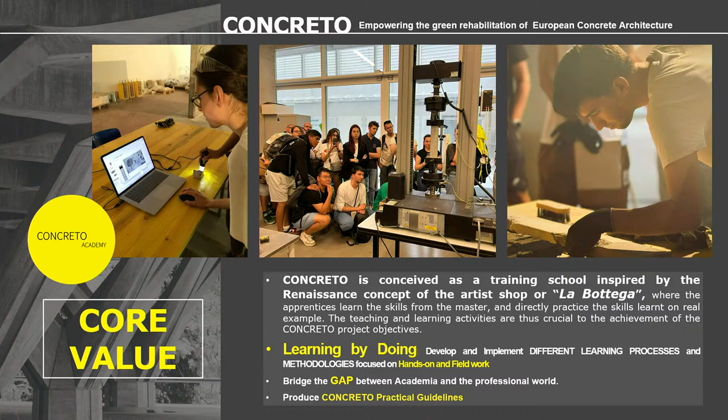It's really more conceived as a fellowship, as an apprenticeship, than a formal education in a way. And the ultimate goal is really to bridge the gap, to create a dialogue between, on one end, the academic world, which provides the great formal education that most of you in this audience have, and the professional world, the practical. Because as you know, since you're probably involved in this type of work, the success of our intervention relies on the quality of what happens in the field. So this is a very important aspect of this project.

The background, as Elisabetta and the previous speaker, who gave a really nice welcome, hinted, is why we decided to develop this project. On one end, we were moved by the safeguard and protection of modern architecture, modern heritage. On the other hand, responding to urgent European policy to renovate and really work with our existing built environment, and more simply, we have a very large portfolio of concrete buildings and concrete infrastructure that are getting older and are in need of our help.

Nobody can deny that this unique man, the work of Pierluigi Nervi, has indeed been one of the main inspirations of this project. It certainly brought me back to Italy from the US to work on Nervi, so for me, it did the trick. But indeed, Nervi left us an incredible legacy. The foundation was established in 2008 by Marco Nervi, who is hiding in the audience. We will point him out in a little bit, and indeed Elisabetta. In the past two decades, they've worked really hard to promote, protect, and preserve Nervi's work, but not only.

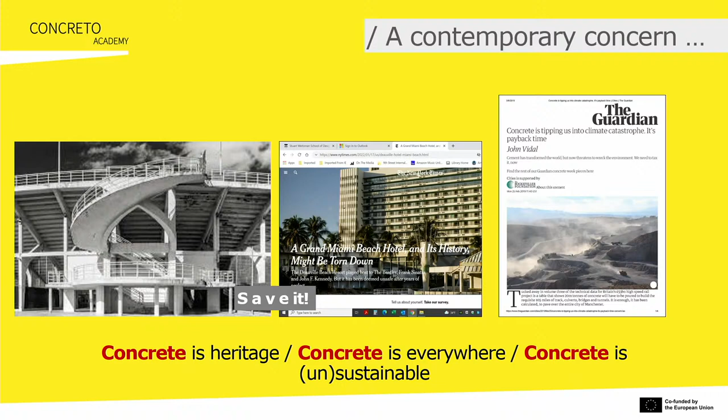Not only that, but concrete today is the most widely used substance after water, and indeed the third largest carbon dioxide emitter in the world. Any study of concrete today, past, present, and future, must consider contemporary concern for retention and reuse of what has already been built and the industry's ecological transition to greater sustainability.

Despite the great progress achieved in the last 200 years since the introduction and patent of Portland cement, which we celebrated in 2024, concrete technology has advanced greatly as a material that has allowed us to build our cities, but it's still very disappointing when we look at stats on how we are doing with our interventions in terms of repair, durability, and performance. I think in this audience we can fairly say that we can split the blame between the design professionals and the people that actually do the work in the field.

For this reason, we reflect that working with this material, although very economical and very versatile, requires a very specialized set of skills. It's artificially made, it's made in the field, which on one end gives us incredible opportunity, but on the other is always a good reminder that it relies a lot on the quality of the craftsmanship. So as we are faced with intervening in this architecture, thinking about this type of specialized skills is incredibly important.

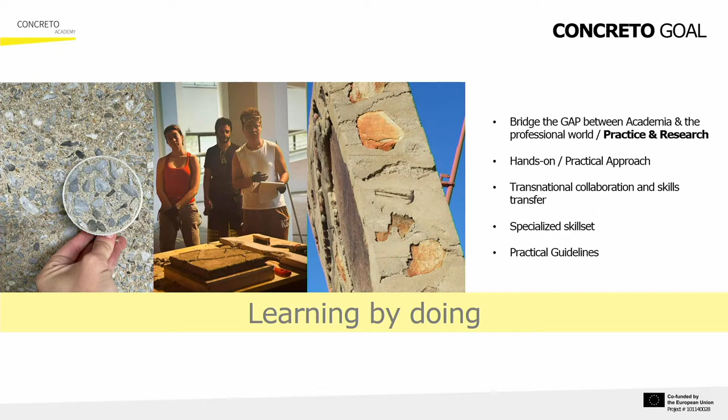So after this little background, this has been the goal behind this project: to bridge the gap between practice and research, to give a practical approach, to show how things are done, to allow professionals who design interventions to see what it takes to do a patch repair, which is still today quite a challenging task. All the teaching and training activities of Concreto revolve around what we call the five skill pillars of knowledge, the A to Z of working with existing concrete structures, starting from concrete assessment and moving to all the different types of techniques.

Who takes part in this project? They're all sitting in this room. There are students from architecture and engineering schools. There are students from VET organizations, craft schools, who are going to be the technicians in the field of tomorrow. And then there are young engineers and young architects already working in the field.

The Concreto journey, as we refer to it, is a one-year program. We are not meeting every day; it's not a continuous 360 concrete full immersion. We have three appointments during the year. We start with an online introductory training where we first get to know one another and introduce some of the big challenges and main topics through case studies. This year we started in January. Then we are here now, about to complete our Master Your Skills, the eight days of hybrid learning. Last year we were hosted by our partner in Milano, at the Polytechnic of Milan. This year we're here in Madrid.

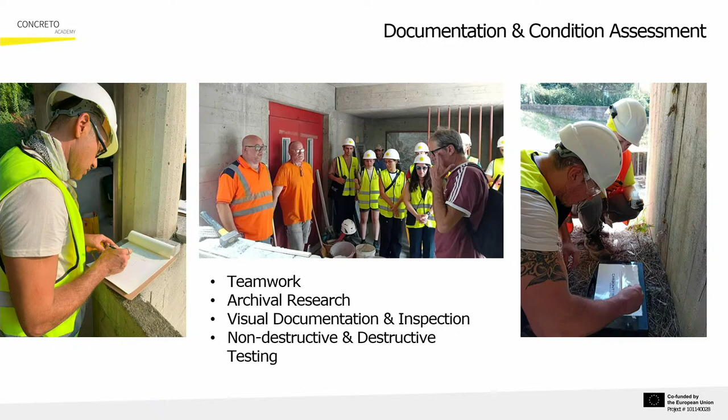So they really start from archival research, and then they were assigned different parts of the building to identify how the building was built, and then continue with some of the most common diagnostic testing usually done when working with concrete.

After spending a week in the sun, we brought them back inside to the laboratory with no air conditioning, where we really started going through the basics of how concrete works, making some concrete, what it takes to change ingredients, and how difficult it really is to work with this material. We also put Marco to work, as you see here. We had to have a kind of blessing before we really got going.

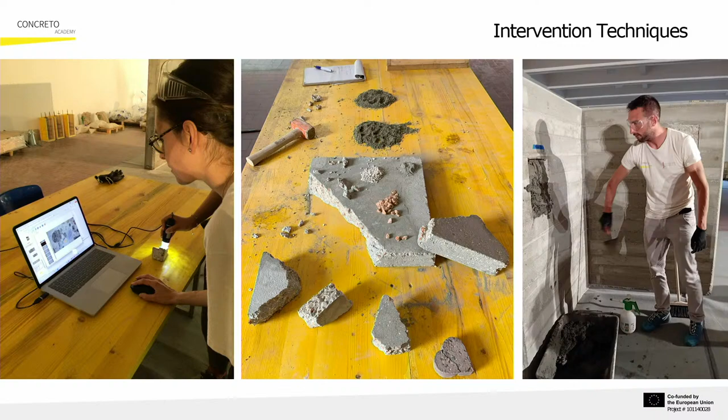These are some additional exercises dealing with how to match and work when replicating historic concrete. We have Matteo here trying to perform a patch repair, which I think he can confirm was not a really easy task. We also touched upon electrochemical techniques and so on.

So in the end, regarding the sustainability of this project, it is a 3-year project. We are in the 2nd year, with 1 more year. As the end goal of these 3 years, we have the publication of practical guidelines referring to the different types of intervention and assessment for concrete, and also the production of very short massive open online courses on an open source platform. And then, as you can read there, the future is also to be able to independently continue this as a training institute.

We should maybe mention the book that will be coming out. Yes, we are also very close to publishing one of the first products: a state-of-the-art research and literature review done from the start of the project, trying to really understand the gaps, what we are doing well, what we are missing. And of course we have to call out Guido from Docomomo, because they were leading this effort and have done a really great job.

Concreto is an alliance for enterprises and education project under the Erasmus Plus program launched in January of 2024. Led by the Pierluigi Nervi Project Foundation, the Concreto Consortium includes 13 partners from Italy, Spain, Belgium, the Netherlands, and Turkey, comprising higher education institutions, vocational training organizations, national trade associations, and modern heritage organizations. The project draws inspiration from Pierluigi Nervi's architectural legacy and focuses on developing skills for the green rehabilitation of concrete architecture.

Inspired by the Renaissance idea of the art shop, La Bottega, Concreto is conceived as a training school combining theoretical learning with hands-on practical experience. Each year, Concreto brings together university students, craft workers, and young professionals to learn and collaborate together, aiming to bridge the gap between academia and the professional world. Concreto identified 5 skills pillars of theoretical and practical knowledge for professionals to master when engaged with the rehabilitation and regeneration of our concrete buildings.

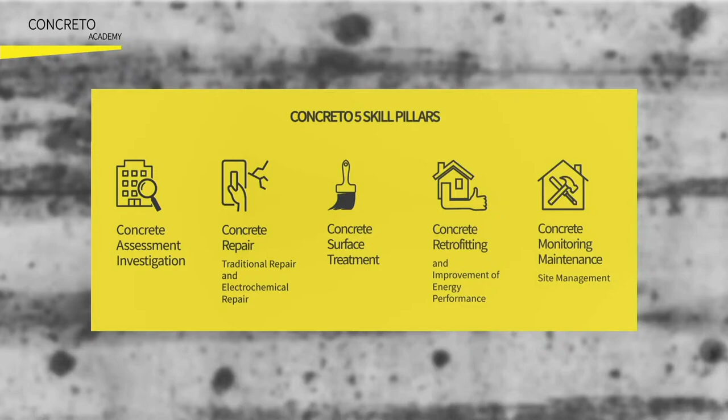The teaching and training activities are organized in 3 sequential units around the 5 skills pillars as Concreto workshops, intended to link education with practical sessions. Starting with the Concreto Stepping Stone, then followed by the Concreto Master Your Skills, and ending with the Concreto Masterpiece, the final summer school with 100% hands-on fieldwork experience, which will take place at the UNESCO site in Ivrea in Italy. The Concreto Academy supports the two-way approach of principle and practice, promoting smarter and greener renovations to ensure the safeguard of our concrete quality architecture.

The Concreto Academy seeks to equip today's professionals with the skills needed to become tomorrow's experts in sustainable building practices. And remember, our European concrete quality building stock is a non-renewable common good, whose preservation and empowerment are the responsibility of society as a whole.

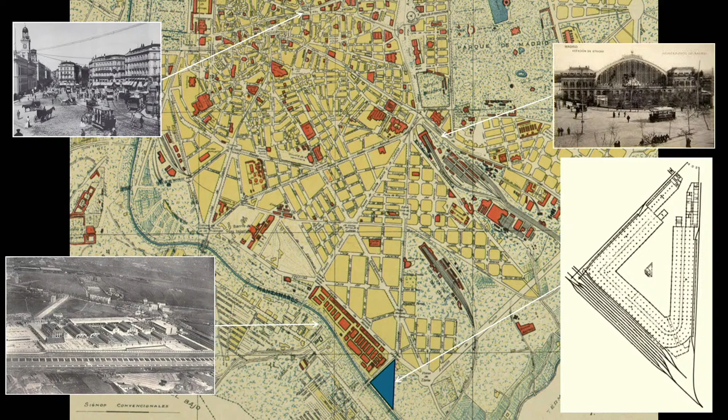Close to it, there was a site of the city council with this triangular shape because of the railway tracks, and it is here where the council decided to build the market. Matadero had been built in a regionalist style; in Madrid the regionalist style used stones, bricks to make arches, etc.

But the architect, Javier Ferrero, decided to change this completely, and he used concrete to build the new market, and made another decision, which was to use the space in a very functional way, placing all the buildings at the edges of the triangle, leaving in the center a huge square where sales could be done.

Here is Javier Ferrero and some views of the building at the edges of the site. You can see the section, and it is always the same. It's a very repetitive frame with large spaces and with no decoration, which places it in the rationalist style of architecture. Only on the second floor there are two quite large canopies, we'll see later, that break this uniform architecture and structure.

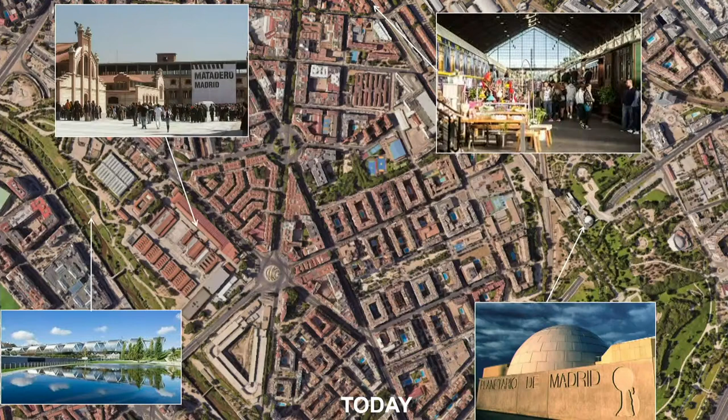It was in use from 1935 until 1983, when another bigger market was built, which is Mercamadrid. From then until the beginning of this cycle, it was abandoned, and many damages and problems arose. The city has been growing, and now that suburb of the 1920s is a center of leisure and culture in Madrid. I already mentioned Matadero, but there are other places for leisure and culture. So it is important that this building has a use. It is very important because I live here, so it's good for me.

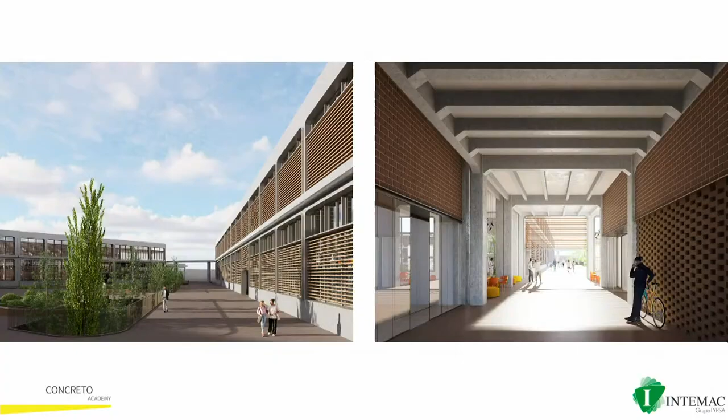The idea of the project is to maintain the idea of Javier Ferrero, which is that great square in the center and the buildings at the edges. Some views of the rehabilitation that is now in course, and as you can see, the structure is maintained, and it's the same as it was 100 years before. Some views with the new uses.

And a question arises. It will cost 100 million euros. Somebody could ask if this investment is worth it. I have no doubt, and in this context, nobody doubts, because of the sustainability and heritage values that this building and this architecture have.

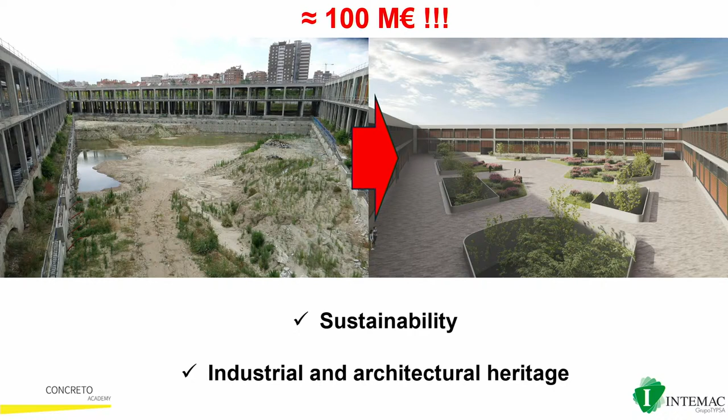But let's go with the structure, and we have to go to 1931 when the market was designed. It is interesting to see that although concrete was already a consolidated material, the structure is very similar to those of Hennebique at the end of the 19th century, with those frames, with the haunches where they meet the column, with ribbed slabs, etc. They are very similar structures.

Of course, those patents had passed, and structures like those of Freyssinet or the roofs of the German engineers, Dischinger, etc., had already been built. And in fact, Le Corbusier had published Towards a New Architecture, and had embraced concrete for architecture.

In Spain, the situation was quite similar. At the beginning, we used patents, mainly from France. Ribera was the engineer who introduced most of them. And from 1910, concrete was taught in the school, in the Polytechnic of Madrid. After Ribera, many engineers came. You already mentioned Torroja, but there were many others.

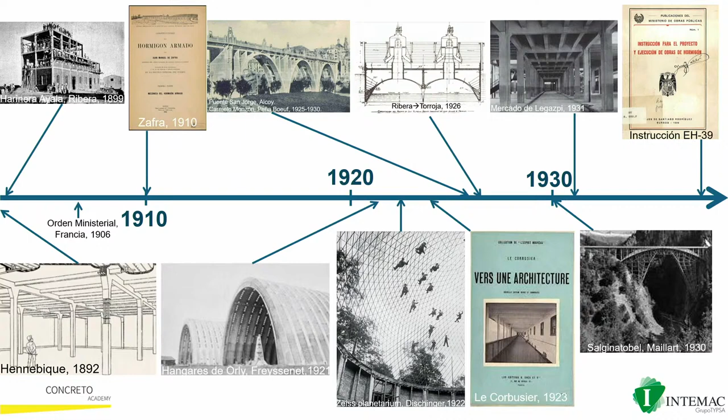Alfonso Peña, that I mentioned before, was a civil engineer. He had teachers like Zafra, who was the first teacher of concrete in the Politécnica de Madrid. And when Zafra died, he took his chair of concrete. He published many books that have been a reference for many engineers in Spain, but he didn't have many projects. But he imagined many projects. He was a dreamer.

For example, it surprised me when I studied him for the first time that in the 1930s he already dreamed of a bridge over Gibraltar. That surprised me. Another interesting fact about Alfonso Peña is that he was the Minister of Public Works in Spain after the war.

Today, Carlos Polimón, who is an expert in bridges in Spain, is not going to speak about bridges, so I'm going to tell you about a curiosity of Alfonso Peña: in 1932, he designed an aqueduct in the north of Spain, in Tardienta, but his partners didn't like the design, and they had doubts about the security of the aqueduct. He made models to prove that it was correct, but because of the war, this project was stopped.

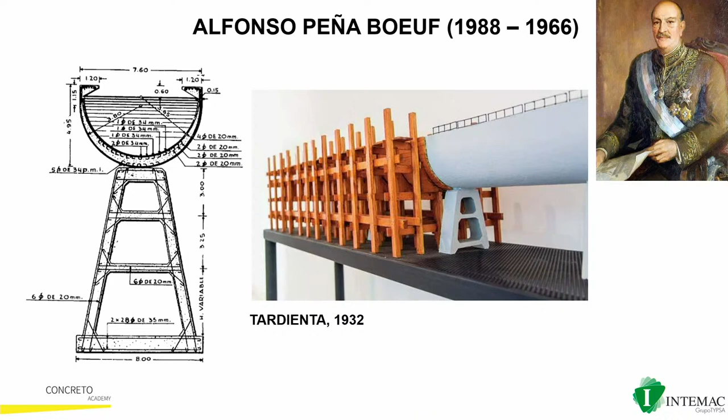After the war, they made some proof loading, and they checked they were right, so they could build the aqueduct, and it was the Minister who inaugurated his own work, which never happened in Spain. This structure is very similar to that of Torroja. The other one is much more elegant, but maybe Alfonso inspired Torroja in the beginning.

Let's go back to the market. As you can see, it is a very robust structure, mainly in the central corridor where vehicles had to go to distribute the food. In the roof, there were these canopies, which are 6.5 meters. It's quite a lot. In fact, the first time I had to check the structure, I didn't know how it worked, because I didn't think that an engineer then could design this by torsion. But it wasn't like that. He designed a lot of torsion reinforcement to resist this canopy.

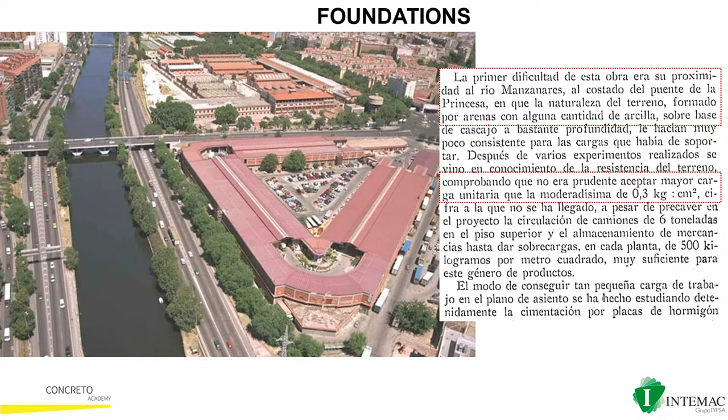But the main problem of the market for the restoration that has been carried out is the foundations. As I mentioned before, and as you can see in this picture, the market is close to the river. Alfonso Peña knew the soil was not so good, and in fact, he designed truncated-pyramidal footings so that the stresses in the soil were low enough. Despite this precaution, many damages appeared in the facades and also in the structure.

I don't want to be very technical, but I can't resist explaining some of these damages. For example, these ones. As you know, at the end of a frame, you have negative moments that compress the bottom part of the section. So, in the beginning, no reinforcement is necessary in the bottom side. But every code recommends or establishes that you have to put 1/4 of the bottom reinforcement into the column. This is because you can have a change of the moments, for example, because of settlement.

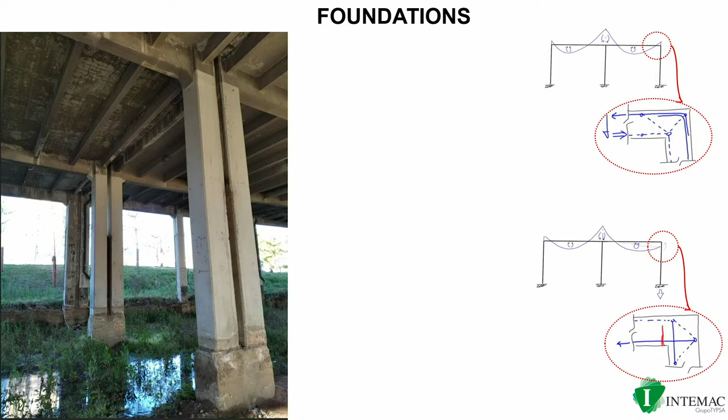And here it's clear. If you have a settlement, positive moments will create tension in the bottom reinforcement that you need at that point. If you don't have it, or as in this case you have it but it is not enough, great cracks appear, and they have to be treated. Because of these kinds of damages, and because of the new uses and new floors in the market, underpinning had to be done in all the foundations.

It was decided to do it with micropiles, and the problem of this kind of intervention is to transfer the loads from the column to the micropiles. In the beginning, if the loads are not too big, we can do it inside the existing footing. It means we have to check that the bond between the micropile and the footing is high enough, and that the stresses generated in the footing are also low enough. This was not the case in most of the footings of the market, and another solution had to be found.

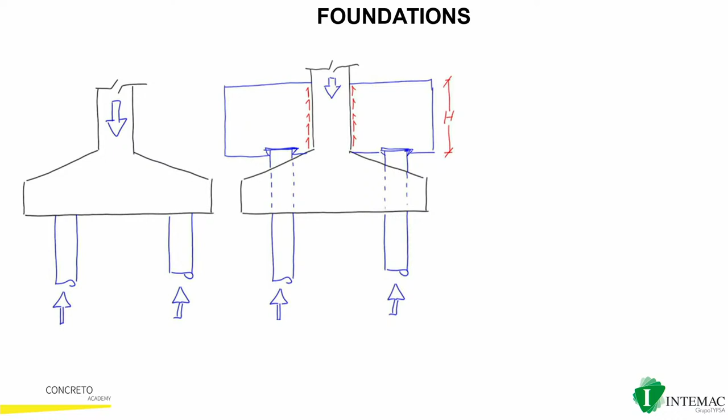As there was no problem of height over the footings, we decided to make caps over the existing footings. But the problem is the same: we have to transfer the loads from the column to the micropiles. And to do this, we have different mechanisms. The first one is just shrinkage. Because of shrinkage, there will be compressions against the column, and this will improve the bond between the column and the cap.

If we don't trust in this shrinkage, we can analyze the reinforcement. We can place it analyzing shear friction, which means that when the column tries to slip inside the footing, the cap in this case, the reinforcement will be in tension, which means that there have to be compressions against the column. Okay?

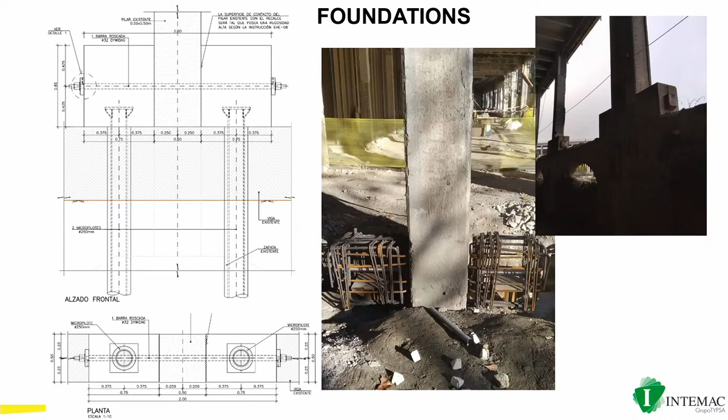If not, another solution is to pre-stress that cap. And this is the only solution in the case of the facades, as you can see here. I don't know if you can see the point, but here is the existing footing, and this is the new cap that is pre-stressed, so that there are compressions that improve bonding. This solution was also used in the interior columns. Here you can see the execution of the micropiles, the placement of the reinforcement, concreting, and then pre-stressing.

Here another doubt arises, because once you pre-stress, you don't know what you are pre-stressing. What you want to do is to pre-stress the cap against the column, not the cap itself. But, well, they decided to do this, and as other mechanisms work, it's enough for us.

These interventions meant 15 million euros. It is a lot, but it is not so much if we compare it with the amount that the council wants to save because of the booking or renting of other buildings. All the people will come here, and they won't have to rent other buildings.

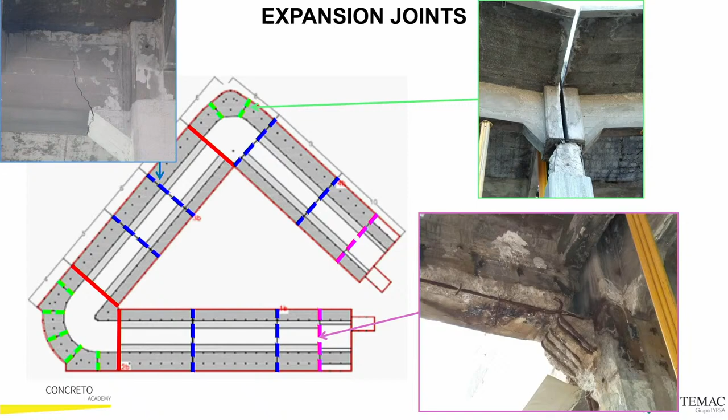In both cases, we decided to eliminate the joints and to change the structural behavior, placing new reinforcement in the top side of these elements, so that new reinforcement will work against new loads. Of course, this kind of intervention must be analyzed, and it is interesting to see that when we modeled the frame without these joints, the movements that result are quite similar to those that the market had with free deformation.

And it is because for very low change in temperature, the supports will crack. And this means that the stiffness of the column will be reduced, and it allows to have the deformation. In fact, the moments in the supports were very low, and as they had a lot of ductility, because the loads are very low and the amount of reinforcement is also very low, ductility was enough, and there was no problem because of closing the joints.

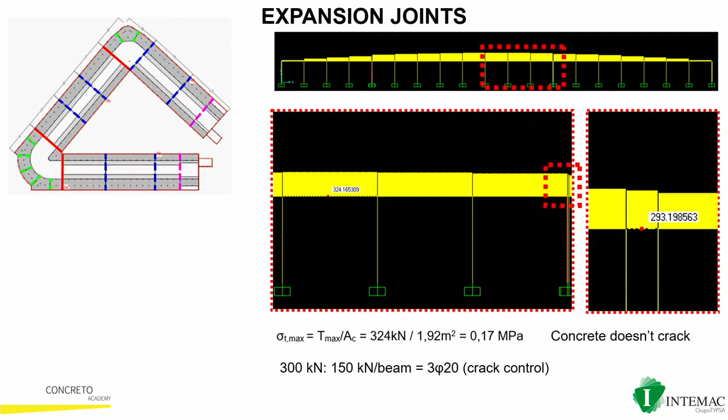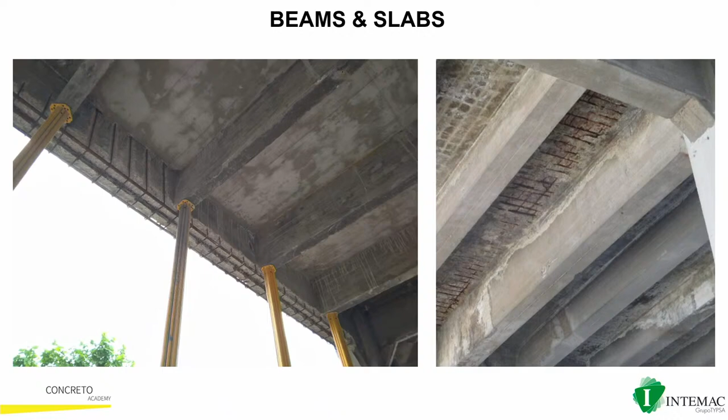Finally, I wanted to talk about beams and slabs, where the problems were mainly corrosion problems, durability problems, but also fire protection, security in a situation of fire. I'm not going to speak about corrosion and durability because we have Carmen and Carlos after me, but I want to point out that in the assessment of existing structures, it's very important to distinguish from existing codes, because existing codes for design are thought to establish some requirements of geometry, of covers, that probably in an existing structure you can't meet. So we have to do a performance analysis to check if security and functional needs are compliant or not.

In this sense, I want to show you the situation of the ribs of the market against fire. As you probably know, in those years, the reinforcement had a sketch like this, with reinforcement in the top side close to the column, that goes down to the bottom side in the center. In addition to that, covers were very low, and this can be a problem in a situation of fire. Why?

As you also probably know, when you heat a beam, an isostatic beam, it will have a deflection, and the moments will be the same, no change in moments in the beam. But if this beam has continuity over the supports, this deflection is not free, and there will be negative moments that make the law of moments increase; negative moments will increase.

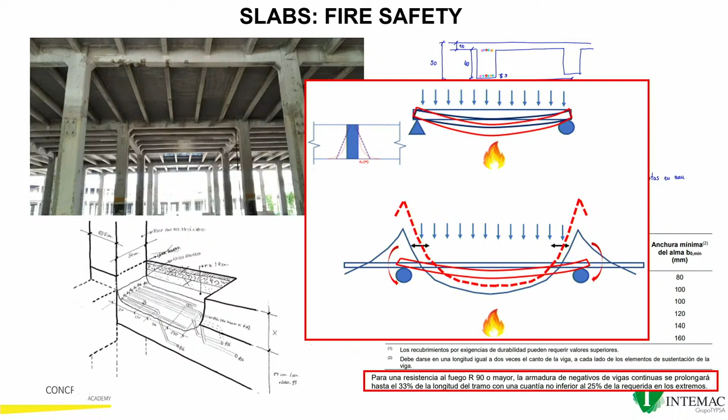That's why in design codes there is a sentence requiring that the length of the negative reinforcement must be longer than in other situations. To analyze this, we can have the isotherms in the section, which are the temperatures for a fire. Including these temperatures in the section and in a model, we can see how the negative moments are increased.

But we are doing something wrong, and it is that in this image we are considering that concrete is the same as in design, no changes because of the high temperatures. But high temperatures mean that the properties of concrete change, and in fact the stiffness of concrete is reduced from the very beginning when you heat it.

If you take this into account, the increase of negative moments is really low. And if you compare the loads with the capacities, which are in red in this graph, it can be checked that the slab didn't need any protection against fire.

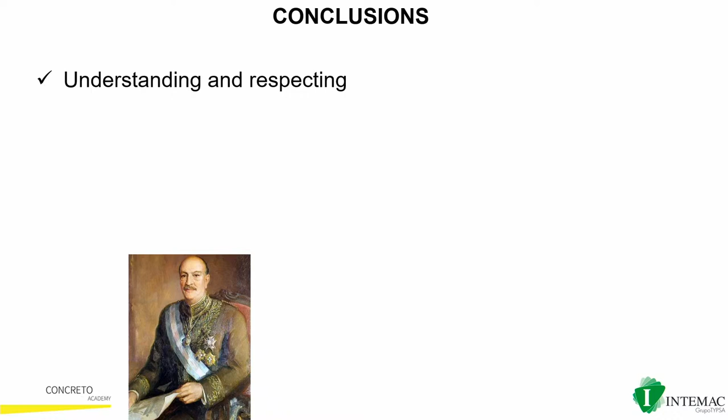Just to finish, some conclusions. The first one, the importance of understanding and respecting engineers, people, architects that have been before us in the works where we go. Second, the best reinforcement is no reinforcement. It's better to analyze it better to try to avoid reinforcement.

Another conclusion is that in many interventions of this kind, the problem is not to assure security. The problem usually is linked with functional requirements and durability problems. And finally, we have to take into account that this kind of works are living projects. We can try to make the best project for the restoration, but there will always be things in the works that will surprise us, and for that we need to be prepared.

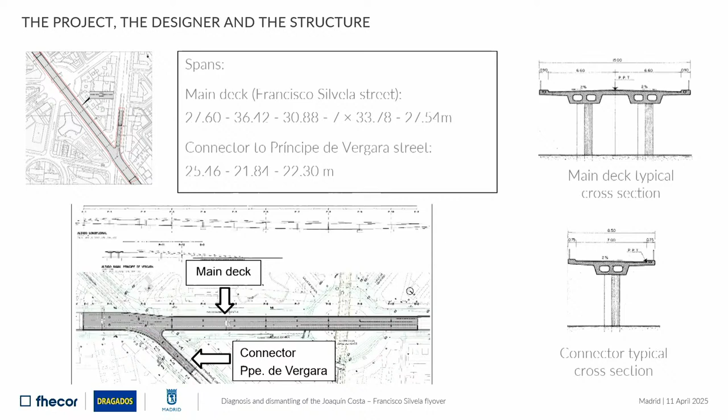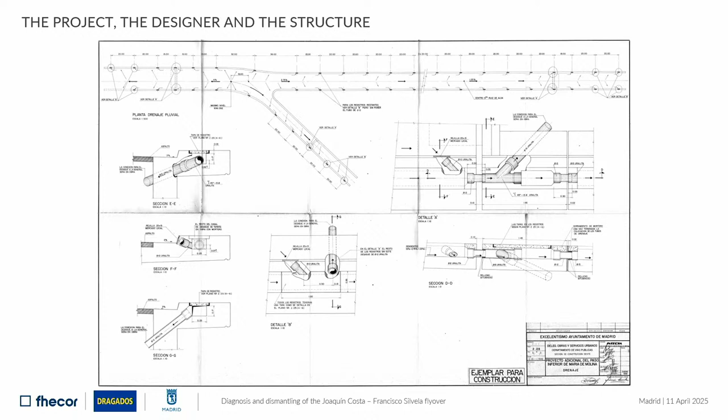Indeed, this bridge is the result of a very good project, a very good construction. This is important to make clear. This is the drawing showing the drainage. Drainage is very important in concrete structures. Water is good for human beings, for nature, but it's very bad for concrete. So any plan, any detail oriented to ensure proper drainage is very good. This is the first thing I wanted to say.

The designer was José Antonio López Jamar, perhaps not as well known as others, but a very, very good engineer. We made a clinical history of the bridge beforehand, exactly as medical doctors do with their patients. It's very important to study the story and analyze it. Indeed, as Juan said, the structure is a very slender one, 1 meter in total depth. The slenderness is quite important, over the normal standards of that time even.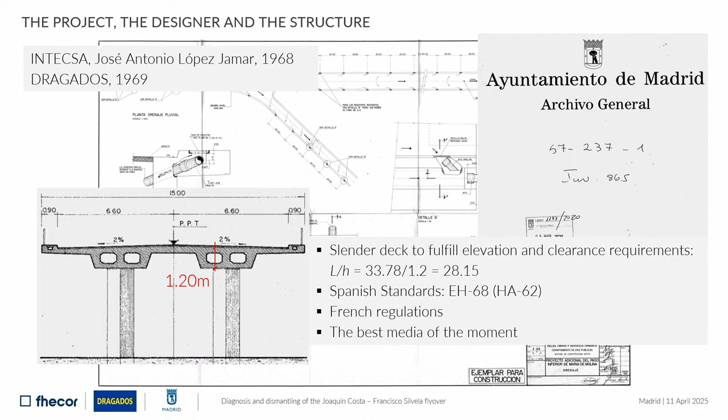The designer followed the Spanish standards of that time, and regarding prestressed concrete, only the French regulations that were available at that moment. The technology used was the best one. The project was developed in 1968. The construction started in 1969. At that time, human beings were on the moon, so the technology was very important. I would say it is a normal, current bridge from this point of view.

This is a plan showing the layout of prestressing tendons, some anchorages here, but it is important to say that this was made in just 1 meter 20 centimeters height. So it was very difficult to provide the geometry. Those voids you see here, with wood formwork, were really difficult. It's necessary to recognize this situation.

Another example, this is a cross-section during the dismantling, dismantling being the fine word to describe demolition. Demolition is a bad word, a sad one, but as Sigmund Freud said, you cannot avoid having a bad government, you cannot avoid health problems, you cannot avoid in schools having students that fail. It is good to fail, otherwise some students could be a public danger in society. So it is important to bear in mind.

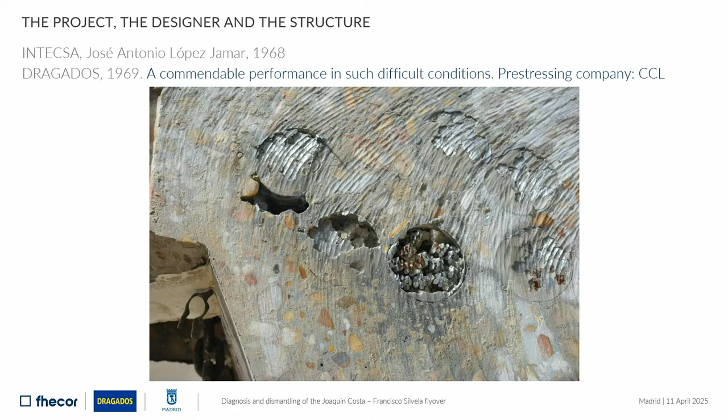This cross-section is one of the many that were carried out. You see some voids there, and you also see the displacement of the strands within the sheathing, showing that some problems had occurred in the past.

Or the detail of the top tendons on the support area. It is important to say that the amount of pre-stressing steel was very high. The criteria at that time were very different from the current criteria today. So the excess of pre-stressing was about 33% in comparison with the current criteria. On the contrary, the amount of mild reinforcement was reduced, 20% lower than today, and yes, it had some consequences.

The detected problems were long along the history of the bridge. The bridge lived for about 50 years. 50 years is exactly the time that codes ensure in the main frame of the safety formats. So it accomplished the situation, although, as Juan said, it was too young to die.

The bridge had movements in the longitudinal direction. Some cracks appear parallel to the longitudinal axis of the bridge. They were systematic. The bridge was on concrete. Maybe you think that it's steel, but no, it's concrete painted. Painter was here to jeopardize the situation. This is not a good strategy.

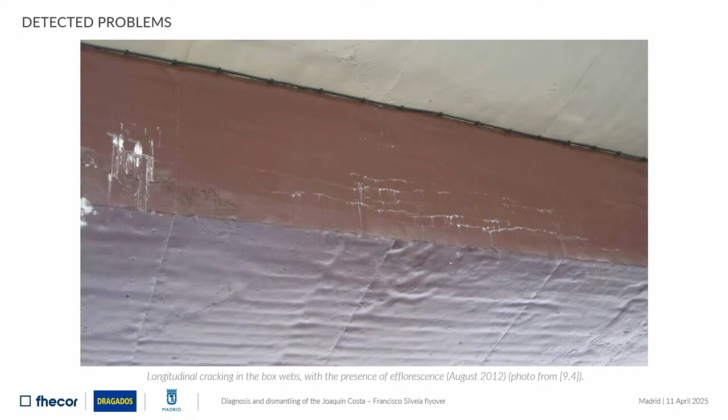Some sealed cracks here in the past without diagnosis. It is always easy to be critical with the engineers that were before you, but it was very difficult to detect the problem. It would be unfair to say that it was a mistake of the past, but we have to learn the lessons of this situation.

One Monday evening, Juan called me. I was in the school, I was teaching, and he told me, we have discovered a crack 1 centimeter wide. I could not believe that, but on the following morning I went there and I could observe that indeed that crack had happened. This crack happened all of a sudden. This is important to say.

We made a trial pit to discover the inside part of the tendon, and we observed that this tendon was broken. And in other positions, on the top part, we detected some incipient corrosion on the wires of some strands.

After analyzing the history, after making visual inspection, as medical doctors do, we made analysis. Analysis and conclusions of the clinical history are the best basis to formulate a good diagnosis. This is very important for young people.

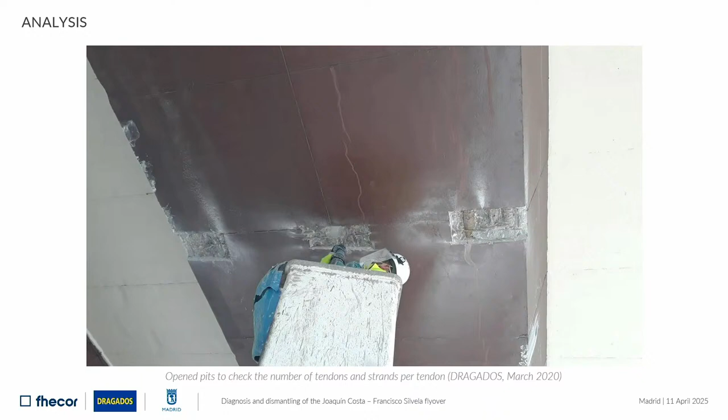We discovered that about 10% of the tendons could have corrosion problems. Some others would have been endangered by the lack of grouting, so those tendons were not protected against corrosion, and indeed they had collapsed. We took some samples of this tendon. I took it with my bike. I move around Madrid by bike. This is an example of sustainability. I went to the school and brought these samples to my colleagues in the lab.

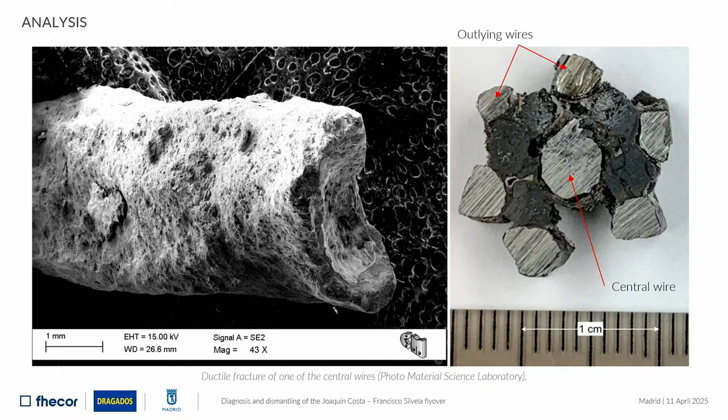They analyzed the problem. They detected that the central wires of this strand behave in a ductile way. This is important. I will show you later on a diagram. But the outlying wires exhibited corrosion with loss of section and another type of corrosion. From the mechanical point of view, central wires behaved in a ductile way, but the outlying wires behaved with brittleness. This is very bad because they have severe consequences on the safety of the structure.

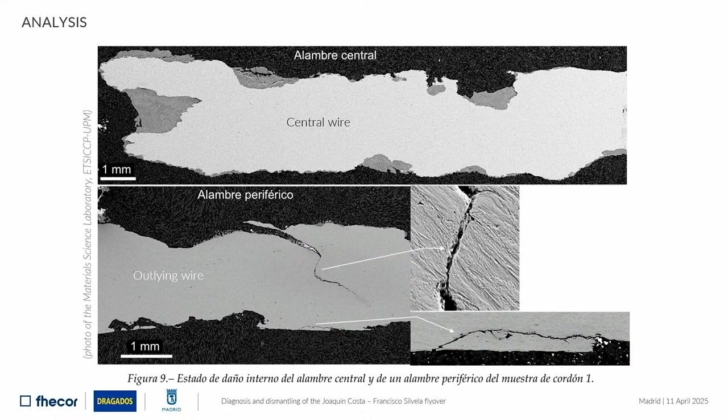Microphotographs of these wires showing the central one on the top part and the outlying wire on the bottom part with these typical inside cracks showing clearly corrosion, stress corrosion, leading to this brittle behavior. Another microphotograph showing the microstructure of the steel with some defects here. You can think that it is typical of old steels. Steel was not so old, first, and second, today the same can happen.

So this corrosion was the most important concern of the team that was there. But it was not the only one. We analyzed also concrete, and we observed, with the help of Intemac, that the samples show systematically cracks in the gravel.

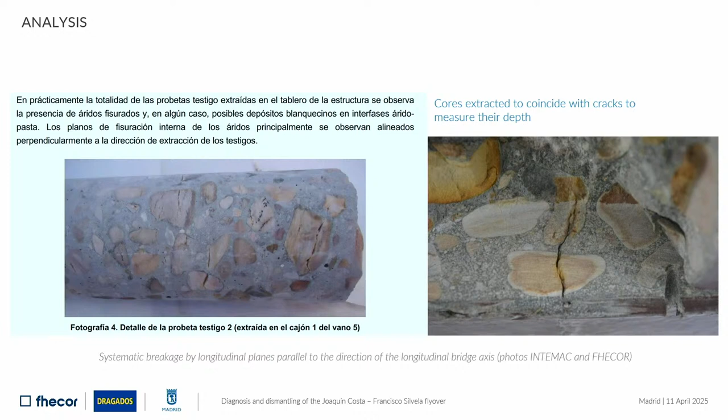The rubble was showing this type of cracks. You can see also here or here. It is very interesting because you see these stones are cracked in the same direction, but the mortar in the middle is not broken. What was happening? It was a mystery. You see these white spots that were showing an alkali reaction.

The reason why rubble was broken is that every element was submitted to the so-called Brazilian test. In this regard, you probably already know that on the central part of this specimen, you have tensile force, pure tensile force. On the top part, you have compression, and due to the difference of elastic modulus of mortar and stone, the mortar is compressed, like the top part of the rubble, but the rest is broken. So

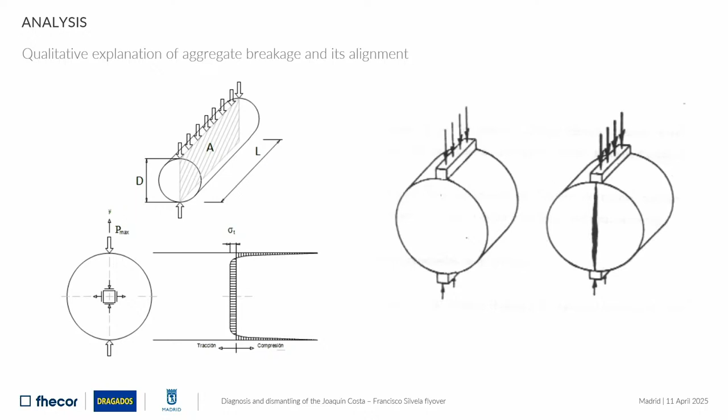concrete is not characterized by the characteristic strength. It's necessary to deepen into the analysis to analyze the microstructure or the mesostructure of the concrete. This is also a lesson to be learned. The design strength of concrete in 1968 was 400 kilos, 40 megapascals today. But the test carried out with samples taken from the bridge showed less than half, 18 megapascals. Average value, less than 30. Elastic modulus, less or about half of the theoretical results.

It was difficult. A matter of much higher concern was the endangered concrete properties, rather than the corrosion of steel. So the bridge of pre-stressed concrete was in severe danger. The quality of the picture is not very good, but you can see here water coming. We opened a drill in the box to analyze if there was water inside. Yes, a lot of water. Dark water, very similar to Coke, to give you an idea. The Coke we drink. No, this was not possible to drink.

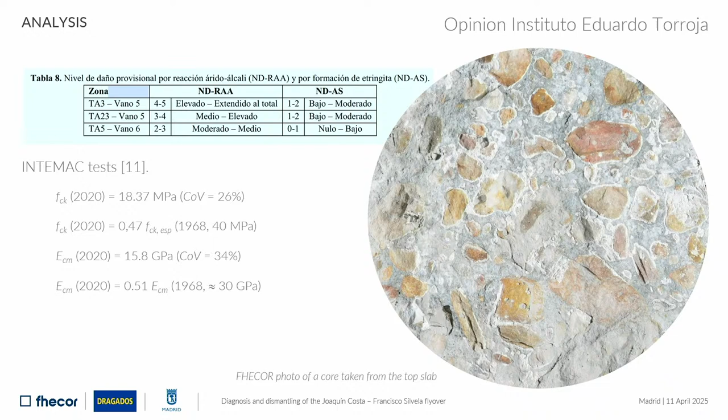We analyzed this water, and we came to the conclusion that it was an accelerator of corrosion, very bad for the structure. You can see here very clearly the surrounding white spots, showing the reaction between alkali and the aggregate. As mentioned, the load-bearing capacity was very endangered from the point of view of the resistance. It was interesting because the logical conclusion is that if a bridge has deflections, it's probably due to the elastic modulus being reduced. But the structure was perfectly aligned. You could still see the camber, the pre-camber they probably provided during the construction.

So the visual inspection and the experimental results became contradictory. Even more if you take into account that deflection is obtained according to this formula. You already know that. So deflection depends on the inverse of the elastic modulus. If the elastic modulus is divided by 2, deflection should be double, but not. The bridge had not experienced deflections. Why? Because on the top part of this formula, you have Q, the load.

But the net load, which is the sum of the external load, self-weight, permanent loads, and so on, plus the loads induced by the deviation forces of the pre-stressing, was almost zero, because by the end of the 60s, beginning of the 70s, even in Spain till the beginning of the 90s, the pre-stressing criterion was to provide the structure as big an amount of pre-stressing as possible to ensure that under permanent or service loads no tension appeared in any section. This is a consequence of the already mentioned excess of pre-stressing.

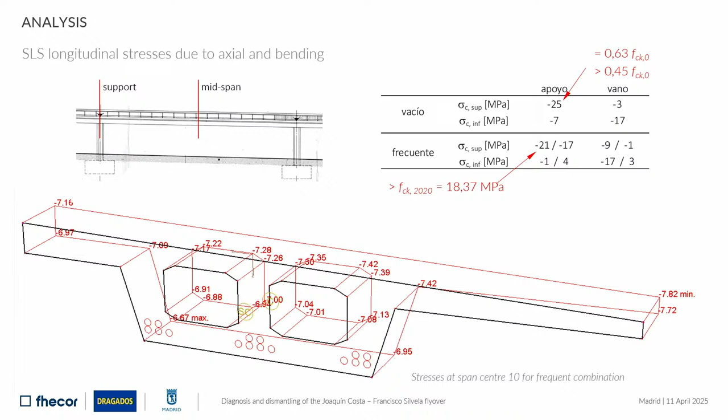To shorten my part of the presentation, we analyzed the structure. We obtained very high values of stresses. The important thing is that the compression stress in concrete was higher than 45% of the real value of the load-bearing capacity of concrete. It means that concrete was undergoing nonlinear creep. So the deformations were increasing a lot. So we analyzed the internal forces, we compared, we analyzed the safety factor, and we came to the conclusion that the situation was unacceptable. The bridge had completed its lifespan.

The bridge was dying, and it was always a safety problem for users. So although it was a very interesting structure, a piece of the heritage of Madrid, the bridge had no solution. Sad conclusion, but true conclusion. It was not possible to strengthen it. This is a normal situation for strengthening: you're not strengthening with zero loads, because a structure cannot be free of loading. The real situation was here. So the additional capacity of concrete was almost zero. There was no margin to strengthen the bridge.

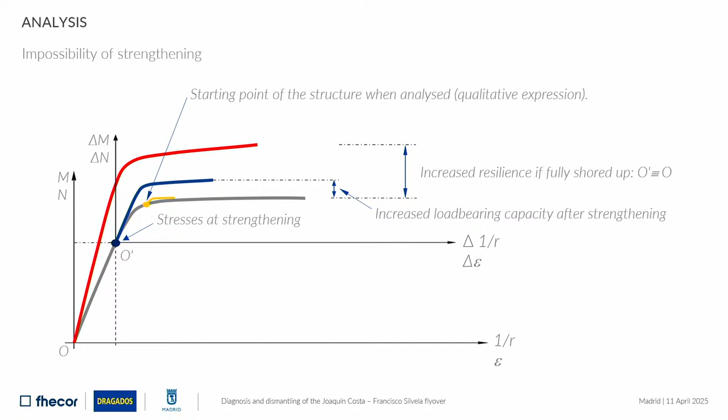After history, after analysis, diagnosis. Diagnosis is the conclusion, when you say what the origins of the problems are and what the consequences are. Well, I am going to be very quick with this. Avoid masking paint. This is very important to make a proper diagnosis. It was a mistake in the past, it is easy to say. I would have made the same mistake. If you see cracks but the bridge seems to be in good condition, you paint, you avoid the criticism of citizens regarding the cracking, and the bridge can continue. This is a mistake. You have to make a diagnosis, like medical doctors with you, exactly the same. Drain.

It is a fact that the number of chemical attacks is increasing. Alkali-silica, alkali-aggregate reaction is quite frequent today, because although the problem started many years ago, 30, 40, 50 years ago, it causes many problems today. The knowledge of history is very important.

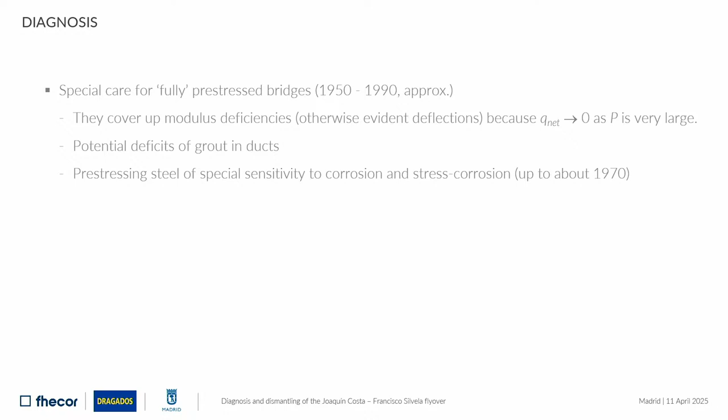If you analyze the construction type of a bridge, you can detect whether it belongs to a risk group or not. Bridges erected until 1990, more or less, especially those with prestressing tendons produced until 1970, more or less, are especially subject to this risk. This is important to bear in mind. And other conclusions that I will forgo.

So unfortunately, we had to dismantle this bridge, and then the Madrid City Council, our client, ordered us, Dragados, to dismantle or demolish it. Well, this work had a lot of conditions, boundary conditions. One of them, remember, it was an urban bridge in the middle of the city in a very busy area with a lot of streets. There are a lot of tunnels and galleries under the ground, which condition the demolition too, as we will see later.

Of course, these works had to be done very quickly, because it's very annoying work in the middle of the city, so we had to do it as quickly as possible, trying to minimize the annoyance for people, for the neighborhood, traffic, etc., and to reduce the production of noise and dust. We had an advantage. All this happened in the summer of 2020 during the COVID-19 pandemic, so the traffic was much lower than before.

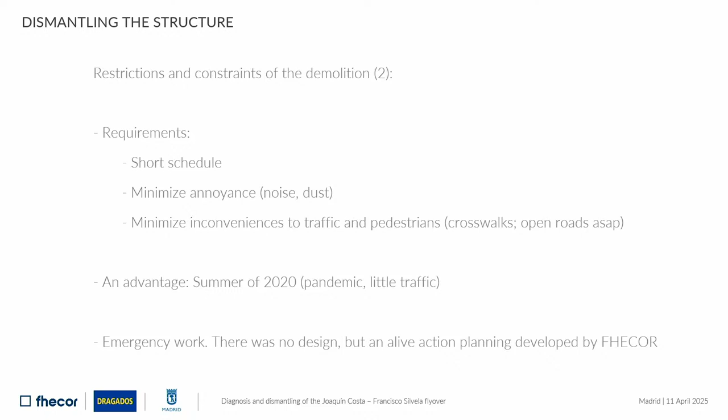At the beginning, we had to choose the way to demolish the bridge. There are two kinds of demolition. The classical, traditional one, which consists in hitting the bridge, cutting the bridge, destroying the bridge. It is very quick, it's good sometimes. In the middle of nowhere, it's a good idea to do this, but we were in a city. It's not a very safe method if there are buildings nearby, for example, and the production of dust and noise is very high, so we didn't choose this method. We preferred to do a surgical demolition with falsework, cutting and dismantling. We will see what this is.

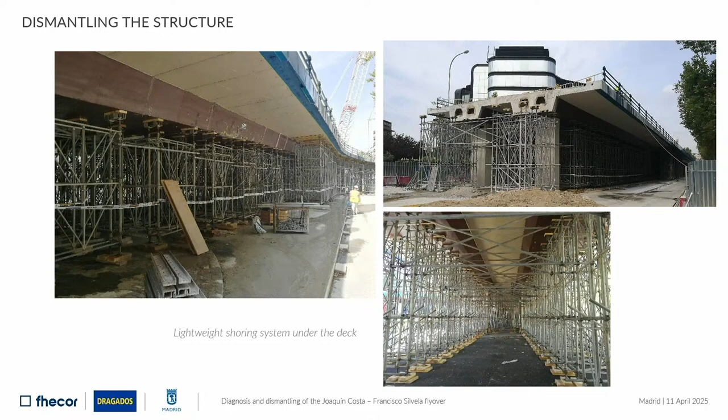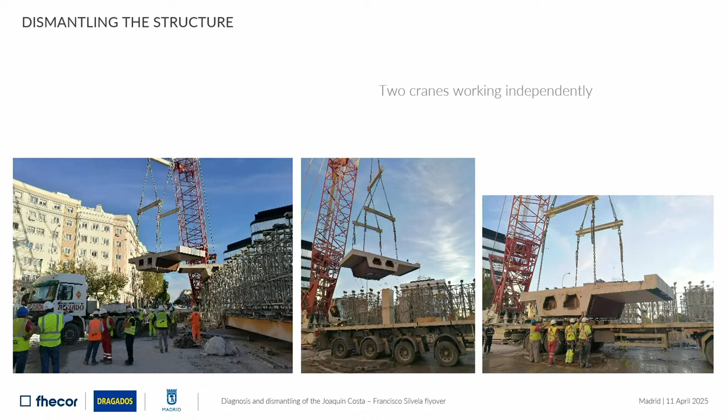After the deck is cut into pieces, two independent cranes take these pieces and put them onto low-bed trailers. Here we have a piece on the trailer, and on the right side we can see that the trailer takes the piece and goes out, to carry the piece to the facilities of a company specialized in processing construction and demolition waste. Why 3 meters wide? Because 3 meters is the limit between a normal transport and a special transport.

Special transport means that the piece is very wide, so it's necessary to carry it through the city by night, with escort, with the police. However, if they are normal transport, not very wide, the truck can go at any time of the day with pieces, with no police, not working at night, not making noise at night.

Imagine if there are operations of the cranes taking the pieces, imagine them working at night, making noise at night. No, it's better during the day, not at night. So it's necessary to use normal transport, 3 meters wide. Very important to not increase the annoyance to people.

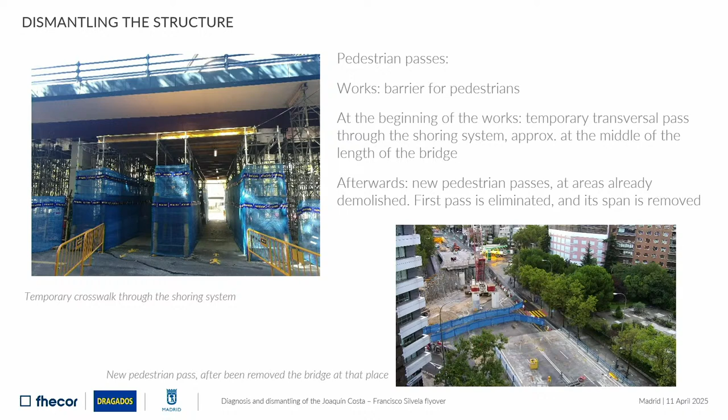We have another pass, so we can demolish, eliminate this and demolish this span. Another thing, for example, we have a tunnel under the bridge here, and probably it couldn't resist the load of the bridge. So we had to make this kind of temporary bridge to take the load of the bridge through these temporary foundations to make no damage to the tunnel which was inside.

When we started the demolition, we discovered that there were these ducts which are made of asbestos fiber cement, a very dangerous material. So we had to make a plan to cut these concrete pieces, trying to make as little dust as possible, and to process this part of concrete with asbestos inside.

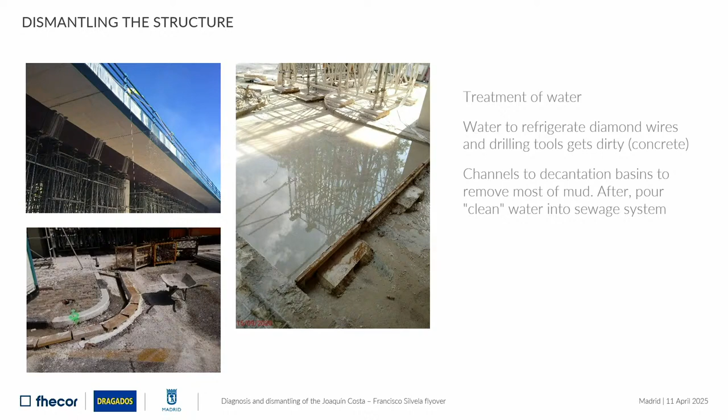Well, and what about dates? We had to do this very quickly, and I think we did it, because we spent 103 days to make these operations, around 3 weeks less than planned. And we think that the neighborhood was not very angry with us, because we didn't make a lot of noise.

Well, this is the aspect of the place in which 3 months before there was a bridge. After, the Madrid City Council had to do other works to change the lanes, to enlarge the sidewalks, etc. But that's another story. Thank you very much.

Thank you very much for this extremely interesting insight. We have a few minutes for questions from the audience, if there are any. If you would like to ask a question, please kindly introduce yourself and indicate to whom your question is addressed. So, any questions? Yes. I have a question. Okay, perfect. We have a question from one of the speakers.

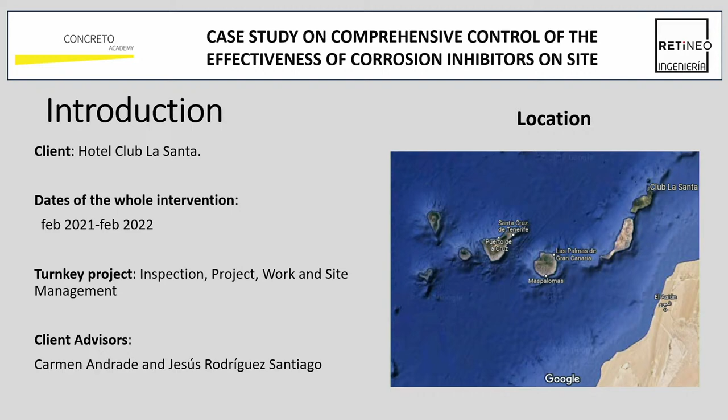And in addition, they host the Ironman of Lanzarote. I don't know if you are familiar with this kind of sport. The Lanzarote Ironman is one of the best-known events for this kind of sport in the world. And it's very hard, in fact.

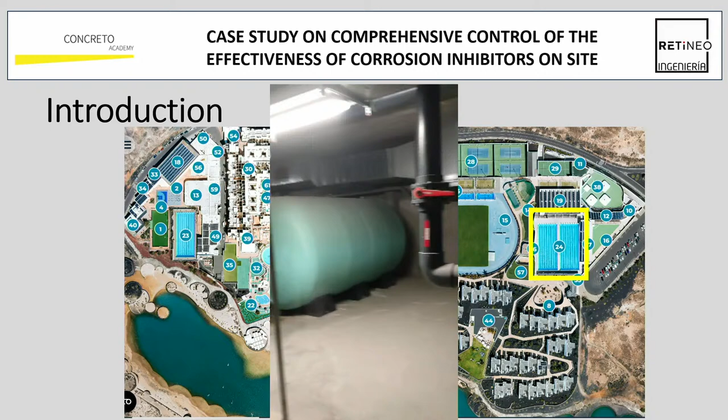Oh, okay. Thank you. So this is the central gallery between the two swimming pools. You can see the state of the concrete. It had a lot of leaks, a lot of leaking, as I was saying. And these are the pumps and all for the swimming pools and for all the hotel. As I say, these are very big galleries, but they are full of conduits, pipes, and services. This is the lateral gallery, and all of the water of the swimming pool, because of a lack of waterproofing, was leaking through the concrete. Okay. So I think with this you can have a more precise idea of the site of work.

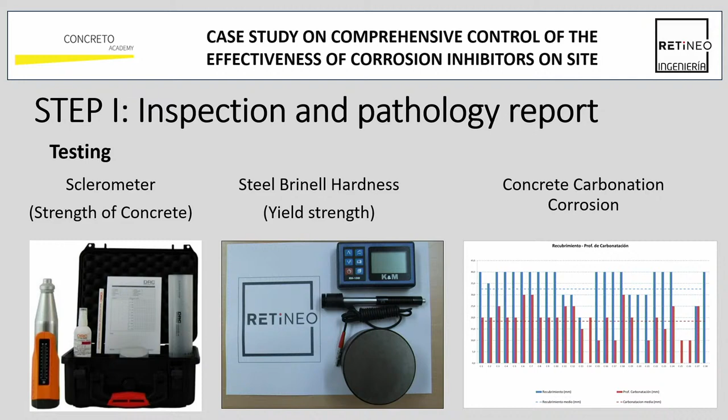As I was saying, the sclerometer is sometimes not a very accurate test. So what is more interesting to do, if you can do destructive tests, is to have some test samples with boreholes, so you can just break them and know the compression strength of the concrete. There you can see the carbonation advance in the samples.

Where we have purple color, the pH is still basic and is protecting the rebars. Where it is just gray at the beginning is the thickness that is not protecting. The pH has lowered and is not protecting anymore.

This is another test we are able to develop. It has a name a bit difficult, the X-ray fluorescence spectrometry. This is a tool we developed in a research project with Torroja Institute in Madrid, and it's able to check the chlorides in the concrete. And it's very fast because we only have to make a drill in the concrete and just take the dust, the powder, and check it with this tool.

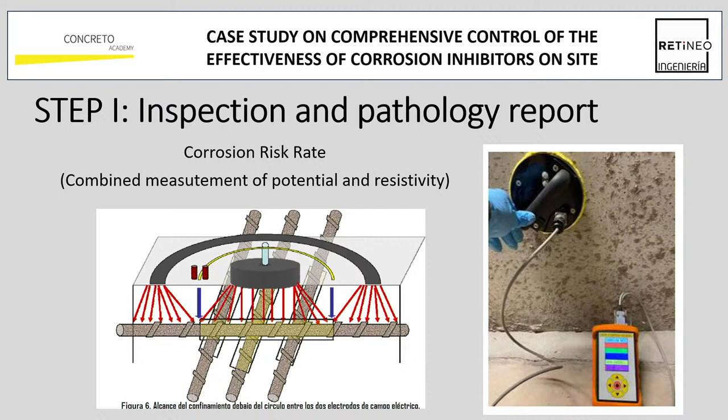This is a tool called GECOR 10, and it's used because it combines the measurement of the potential and the resistivity in the bars in a very concentrated place, 1 or 2 rebars, and gives you very fast the rate of corrosion that you have in the place where you test.

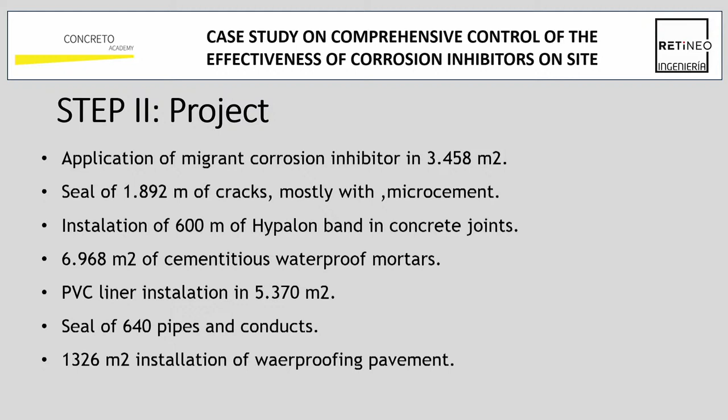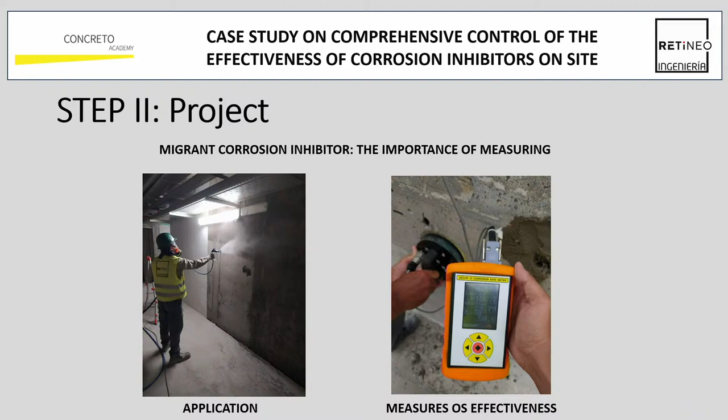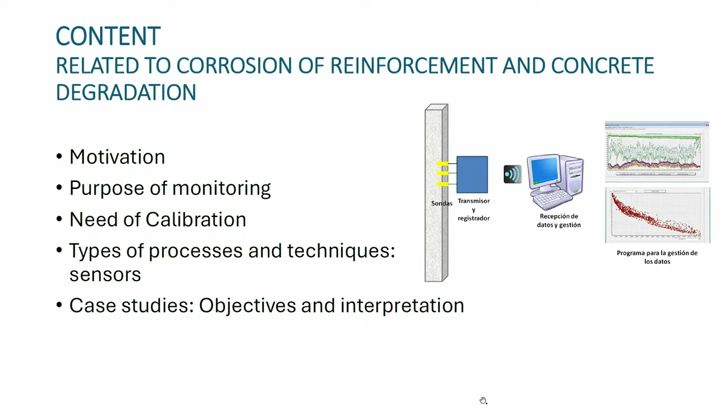About the motivation. Now there is like an enthusiasm for monitoring, and with digitalization, all people think that they need to do something, and the easiest manner to say digitalization is, yes, I place a sensor. But it's very important to think first why to monitor. Like when you design a new infrastructure, I have always listened to the designers say that you need to have first the concept of the infrastructure. You need to think first, not just start to do things. And I think that this is very important.

I would like to emphasize this for you, the young people, because otherwise you may frustrate the owner very much if you don't have clear objectives for the monitoring. And this is what I am going to repeat several times. And also when and how long, because maybe you don't need monitoring for the whole life. Maybe 1 year or some time is enough. So it's very important to answer these points before.

And the first step in monitoring is to identify the objective, why you are monitoring. As I said, this is to avoid frustration, because there are many installations, like happened with cathodic protection, that after some months are there without any surveillance, and this is really a problem for the future if we would like to extend this. And to define the objectives, you may have several. I identified 4 main ones here.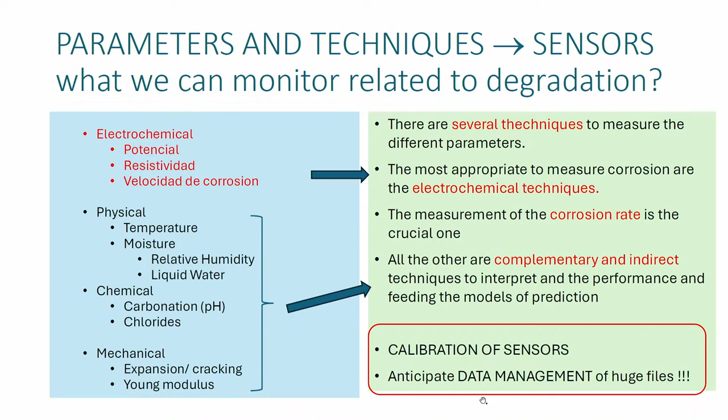But whatever the sensor is, you need to calibrate. The sensors, even those of corrosion rate, are very critical to be calibrated, and you need to anticipate that you are going to manage a huge file, and therefore the sequence, how often you are going to collect the data, is critical, because after you realize that there is a lot of data that is not needed, because if you delay the moment of measurement, you have much better information and you have less amount of data.

Okay, there is bibliography in this area. There are RILEM recommendations. In 2000, we were publishing about the measurement of resistivity in concrete. In 2003, for the half-cell potential and potential mapping. 2004, for the corrosion rate measurements. And finally, we were publishing a recommendation on embedded probes. And in Spanish, through Alconpat, the Latin American Association for Rehabilitation, we have these recommendations in Spanish.

Well, the electrochemical techniques, and here a bit of education, it's short, after I will go through the cases. These are the three techniques I was mentioning: the corrosion potential, simply with a reference electrode that has a potential that is fixed. You measure the potential of the bar, and you can distinguish whether it's corroding or not. Because this has a fixed potential, you can always have the difference. It's like the temperature, you can measure with a thermometer. Here we measure with this reference potential through a voltmeter or a multimeter.

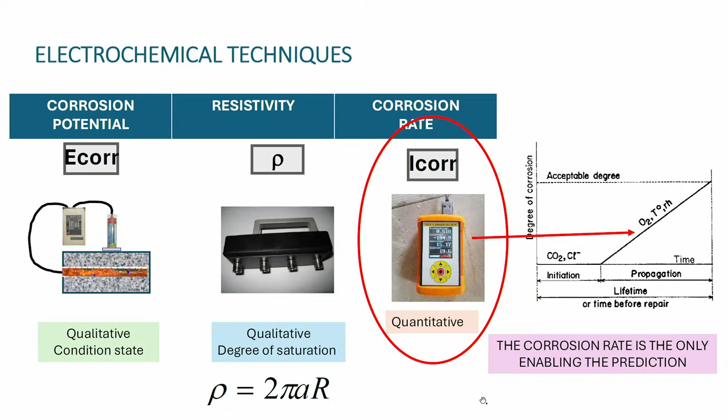But only if you measure a rate, that rate is the change of a property in time, is when you are able to predict or to introduce the result in a model.

Well, on reference electrodes, very quickly, there are several reference electrodes that you can embed in the concrete. For the potential, the manganese that is the most stable, copper sulfate or silver chloride. And each of them have a different reference value, and we have the ranges to just conclude whether the corrosion is low, medium, or high, but that is qualitative, and they are attached to the bars, usually.

For the corrosion, other type, I have summarized: for the temperature is a typical platinum or a thermopar. For the humidity, it's necessary to distinguish the humidity in the air, that is relative humidity, from the liquid water. For the liquid water, we have a small piece of gypsum that has two bars inside, two metals that are different, and when we have water there, there is a difference in potential or a current circulating. Vibrating gauges for the mechanical, to measure expansion.

For the resistivity, we may have a 2 bar or a 4 bar sensor. And for the corrosion rate, we have different types of sensors with different geometries on there. And we may produce integrated systems. In this moment, there are several companies commercializing these sensors, and for me the problem is that you need to calibrate them. Why? I will say in the next one why it's necessary to calibrate.

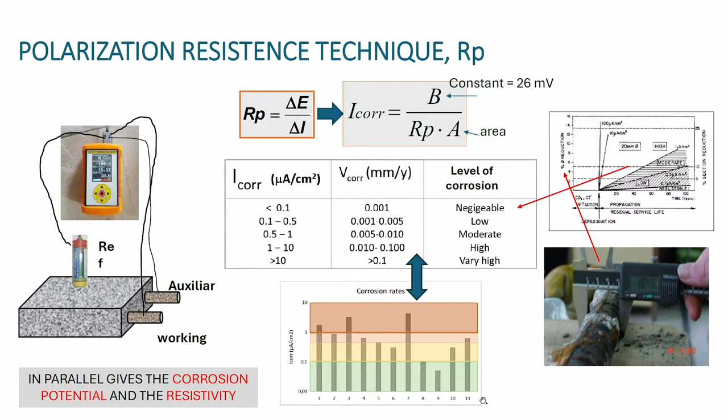But what happened in the real structures? In the real structure, when you apply a current, you need a small counter, and the current is not confined there, it's spreading, vanishing along the bar, because the bar is much larger. In that case, we lack a precise area. And this is the key point with the commercial techniques. You need to be sure that they are able to account for the area. Otherwise, the measurement is not correct. They have errors.

And how we have made it: Geocisa patented in 1990, and we patented several methods to measure that. This is coming from work in one of my masters in corrosion. One is to measure how long this current goes. In that case, you can place several reference electrodes besides the counter and the central electrode, and you measure how long the current goes. Then you can have the total area that is affected. That is what we call the attenuation of potential method.

And the other is to confine, that is what is in GECOR 10 now, to confine the current through a guard ring. That is like a Faraday's cage. You apply a counter electrical field electrode, and you confine. And in order to be sure that you are below this part, you need to have some additional reference electrodes there to be sure that you control there.

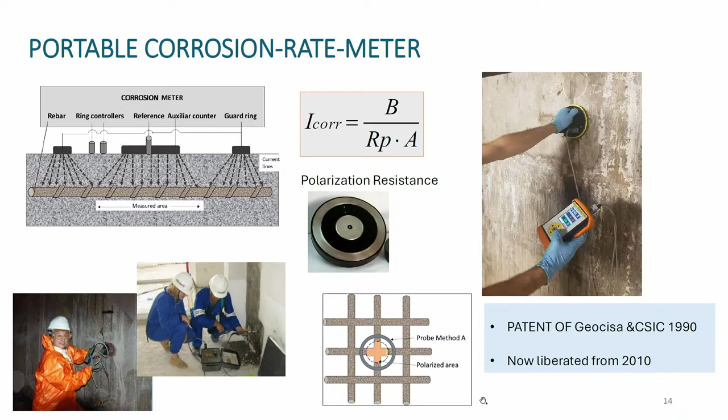And you need always to account how much steel bar you have below this circle that is between these two discs there. And this is a correct confinement, but if you don't have confinement, the current may go in this manner. And the other constraint, the main constraint, is that you need to wait a time, because when you apply the current, there is a transitory period, and that is lasting about 30 seconds.

If you have a technique that measures before 30 seconds, they are going to give erroneous results because they are in what is called the transitory period. You need to go until the signal is constant and you are in a steady state condition. Okay. The other difficulty is that the corrosion rate changes with the weather and with the moisture condition.

In that case, we have collected data now almost 30 years in which we measure along the year, and we detect the seasonal changes of temperature and humidity, the raining periods, and there are changes, and how to manage this. Then you need to integrate the area below each time, and you obtain an increase in the loss of section or the loss of diameter that is similar to that foreseen by Tuutti. That is almost linear, the increase of the depth of corrosion with time.

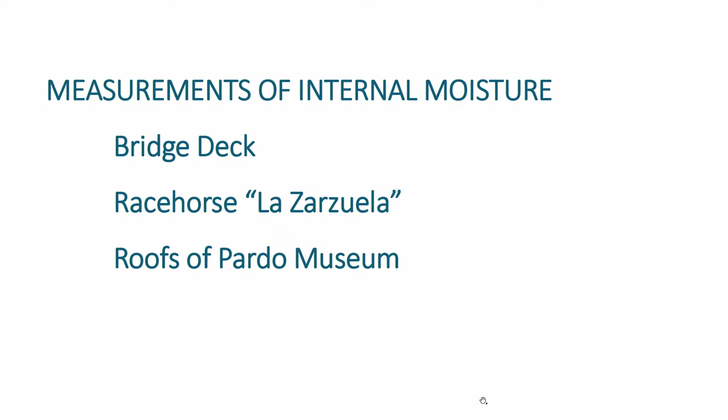Case studies now. I will talk about measurement of internal moisture for a bridge deck, the racehorse of La Zarzuela from Torroja, and the roofs of the Prado Museum. Well, this is a bridge within a Spanish project of the Ministry of Transport; they were interested because they found that between the asphalt layer and the concrete deck, they had a lot of degradation, and they lacked knowing what is happening there.

In that case, we proposed to measure the moisture at different distances from the asphalt layer. We drilled several cores and we placed a humidity and temperature sensor there at different distances. Here, the objective was clearly identified, the accumulation of the de-icing salts below the asphalt layer. And this is how this was, hanging the wires, and these were the humidity probes, and also we installed an external weather or atmospheric station.

And these are the results in this case. This in green here is the closest to the asphalt, this is the other, and this is the other. This is 100% relative humidity, and here is 0% relative humidity. This is the external change, as I said, the seasonal change in temperature and humidity. But look, it's fully saturated near the asphalt. Well, in Spain they are starting to use some impermeabilization layers between the asphalt and the concrete now.

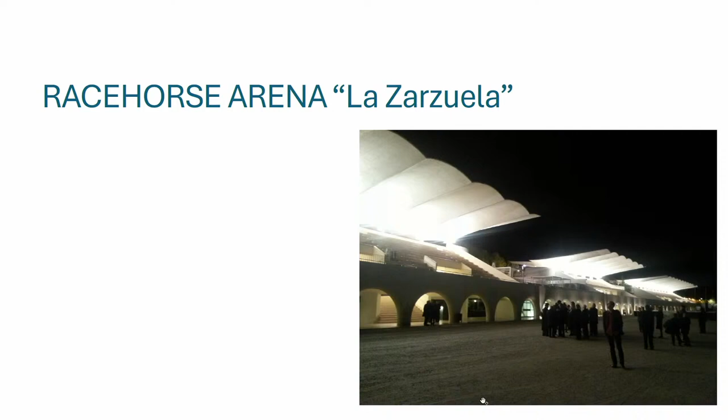Okay, the racehorse arena La Zarzuela, you know that is from Eduardo Torroja. It has been already presented. This was in a dinner that we had there for the 80th anniversary of the Institute Torroja. It's very nice when they have the illumination. And well, it was built in 1941, although part of it was already before the war, and it received several bombs. There are holes there.

And well, this is Torroja during the construction. There are two different photographs, but it is him in there. We have several of him during the construction. There have been several rehabilitations, but the major one started in 2008. And we were asked to make an assessment, and we detected that there is corrosion of the reinforcement by carbonation.

Much less than we were thinking, but what they found, Leonardo Fernández Troyano and Junquera as architects, the designers of the rehabilitation, they found a lot of shrinkage cracking, a lot of cracks, and really they tried to obtain again the monolithism in the shell, and there was a lot of injection of the cracks.

Well, we were dealing with the corrosion. Here we did first a survey with the corrosion rate meter, and we were measuring the corrosion rate in all these parts, and we applied, as I said, the different levels of corrosion by the corrosion rate. But we also installed some sensors there in the three modules.

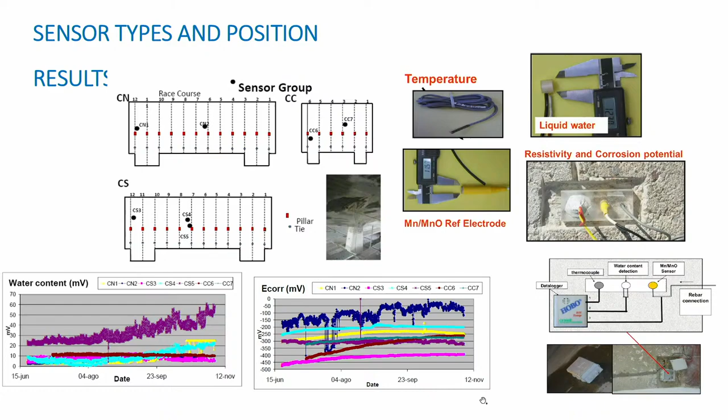We installed several sensors. They were sensors of temperature, the potential, and also the liquid water and the resistivity and corrosion potential, an integrated one. With a very, very simple system, you need to collect the data there. Well, there are several results that we don't have time to comment on, but the people in the Institute now, I assume, maybe continue recording and analyzing the results.

On the Prado Museum, this is not exactly concrete, but I thought it could be interesting for you because it's the Prado Museum. We were really fascinated with the case. There was a leak. They changed the roofs, and they recovered the roof in lead. Instead of tiles, they substituted it with the original roof. The original roof in the Prado Museum was in lead, but this was removed during the Napoleonic War to make projectiles for the guns. In that case, they put tiles, and in this rehabilitation, they tried to recover it.

The problem is that there are a lot of small details, and it appeared that there was a big leak in the room where the Meninas was exhibited. In that case, we were immediately asked by the Ministry of Education, on which culture was depending at that moment. It was Mariano Rajoy, who was later president, and he was asking the institute to make an assessment.

There was a group of architects and engineers looking at the roof and the type of problem, but in our case, since we were durability, we convinced the ministry to install several sensors in the different layers of the roof, because this was a new roof with different layers, and we were thinking that maybe some of them were leaking. We installed these sensors to detect the liquid water: when you have a jump, it is because there is a connection between the galvanic couple inside the gypsum, and you detect when they are in active corrosion.

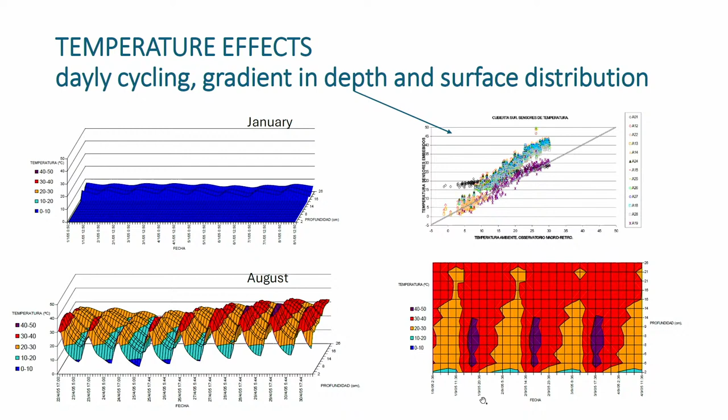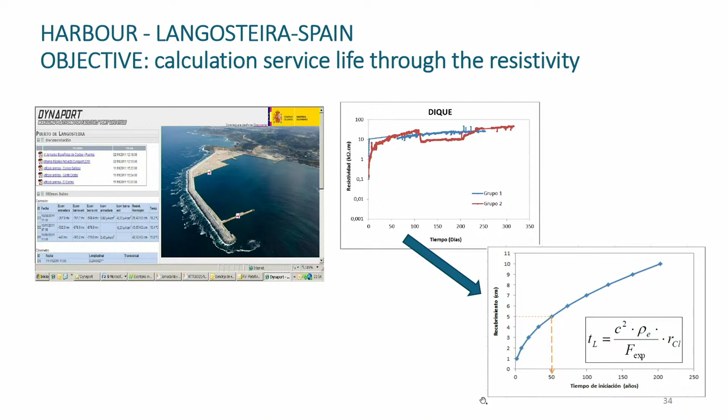And I am finishing. This was the case to detect the passivation. I will go quickly. These are caissons. And this is El Pedrido, also from Torroja, where we installed corrosion rate sensors to know the performance after repairing. And another bridge in Seville. From the resistivity, we were able to predict the time to corrosion in this Langosteira harbour, and I would like to finish with my oldest case, El Cabril, where the radioactive waste is being buried.

For the radioactive waste storage, they use big concrete containers, 30 by 30 meters, that have small containers inside where the drums with the radioactive waste are introduced. They collect this from the different hospitals, treat it, and then introduce it here. And they would like to know the performance of this buried concrete. It is the only case I know where corrosion in buried conditions has been studied, because they want to know what may happen during the 300 years this is going to be working.

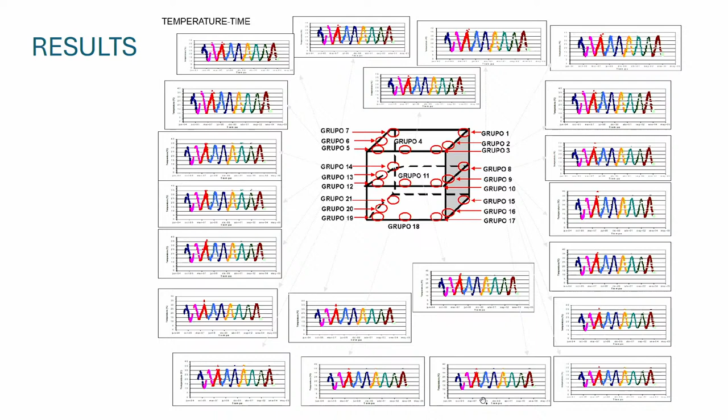Well, we instrumented one container, and beside the buried container we installed the sensor measurements. And this is what happened. The temperature is very important. You see all the seasonal changes; they are important. This is only 2 meters deep, not too much, but the difference is detected. I am finishing.

Key point: activation energy is not the same, it is evolving with time, and also it is changing from the upper part to the lower part. In that case, to predict based on Arrhenius law is very uncertain, because we don't know the precise activation energy.

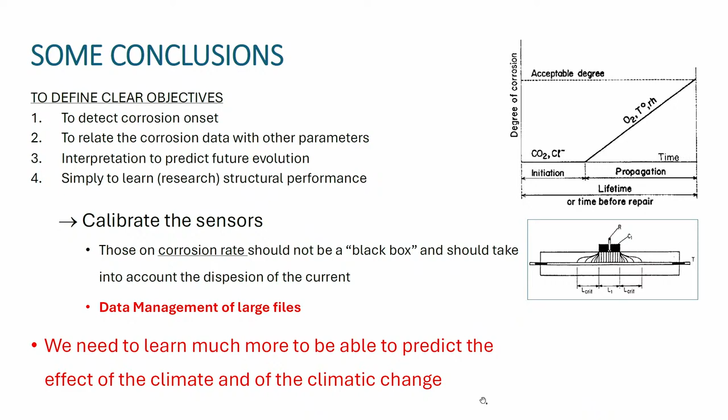To finish: define clearly objectives when you are going to monitor, calibrate the sensors with external humidity, corrosion rate with the corrosion rate meter, and we need to learn much more to be able to predict the effect of climate and climate change.

And this is my last message for you, the young people. We have models for the ambient. We know that the water content is critical, but we don't have the function to predict the amount of water inside the concrete from the climate. Any publication saying that they are going to predict the behavior, if they don't have this function, they cannot predict.

And if we increase the temperature, we are detecting in Spain, we dry the concrete, and that means less degradation and not more corrosion. And this is my last message for you. To predict the climatic change is important, it's a challenge, but we need to make it rigorously. And I say that because there is a Joint Research Centre document that is not taking into account that function. In that case, it is a pity, because you need to be very rigorous, not just predicting more corrosion if you are going to have higher temperature.